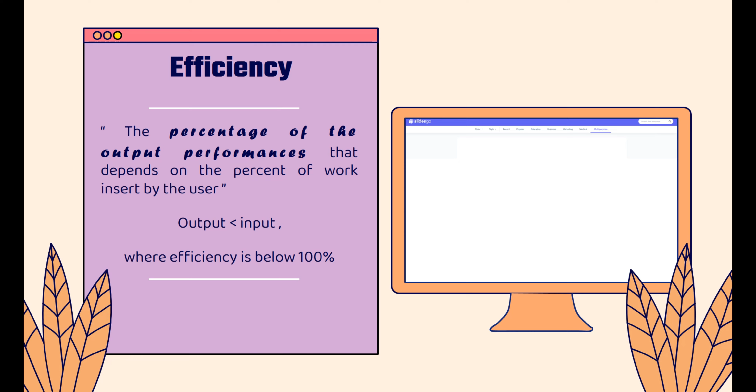Nur Shahada, and I will explain briefly about efficiency and its general expression. So, efficiency is the percentage of the output performance that depends on the percent of the work that is put in by the input or a user, plus the output work always needs to be less than the input work. Therefore, the percentage of efficiency is always less than 100%. And that is why efficiency can be expressed in percentage as output power divided by the input power.

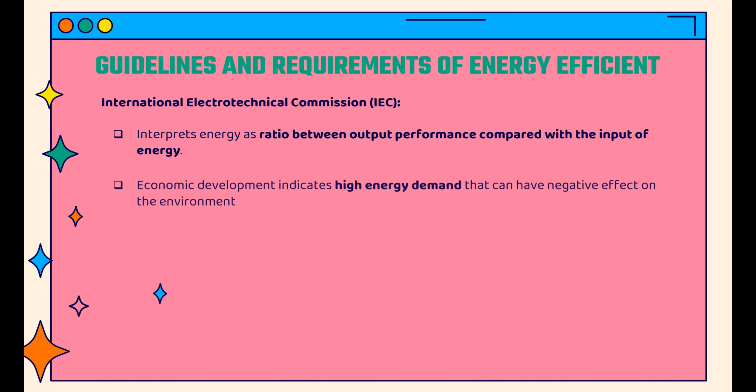Guidelines and requirements of energy efficient motor. The International Electrotechnical Commission interprets energy efficiency as the ratio between output performance compared with the input of energy. Economic growth indicates high energy demand. However, this energy demand can have negative effect on the environment. Thereby, energy efficiency is a cost-effective means for supporting the growing energy demand.

As we know, energy efficient technologies are already available, yet some obstacles hinder the implementation of energy efficiency solutions. For example, one of the obstacles is that they focus on the performance of the device rather than the system. However, standardization can offer solutions to help defeat these obstacles. So, the Advisory Committee on Energy Efficiency has developed Guide 118 and Guide 119.

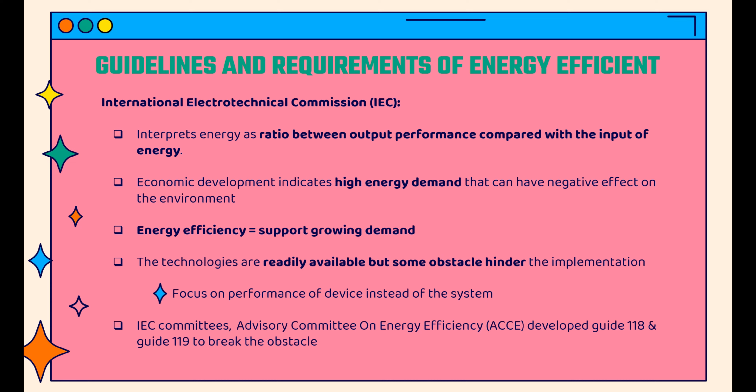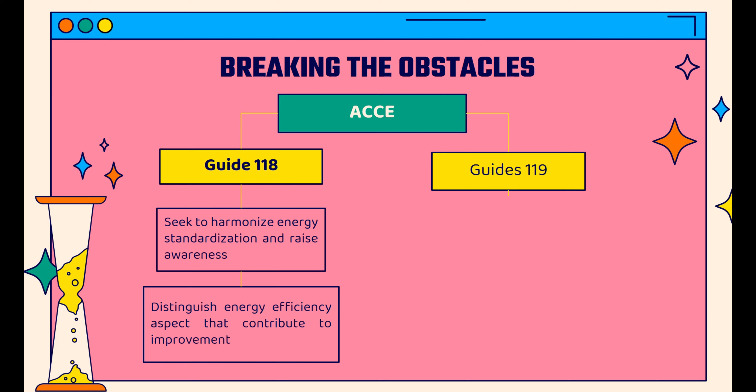Guide 118 seeks to harmonize the energy standardization and raise awareness that IEC publications can affect energy performance in both positive and negative ways. It also assists the committees to distinguish energy efficiency aspects that contribute to the energy efficiency improvement of the product when developing standards.

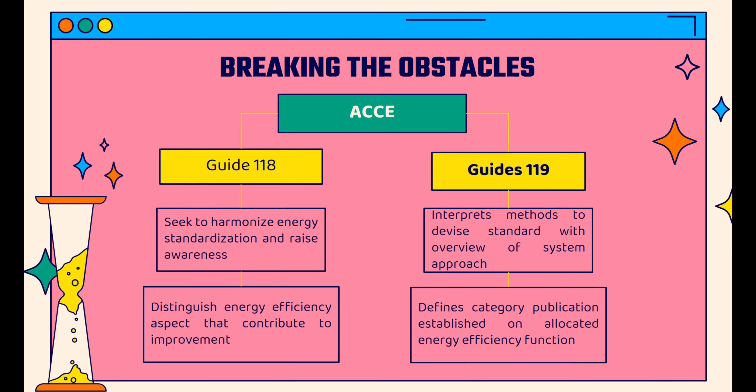Meanwhile, Guide 119 defines the technical and organizational methods to follow for the preparation of these standards. It provides an overview of how a systematic approach can be adopted and defines the type of publication based on the assigned energy efficiency function. IEC also developed an international efficiency classification.

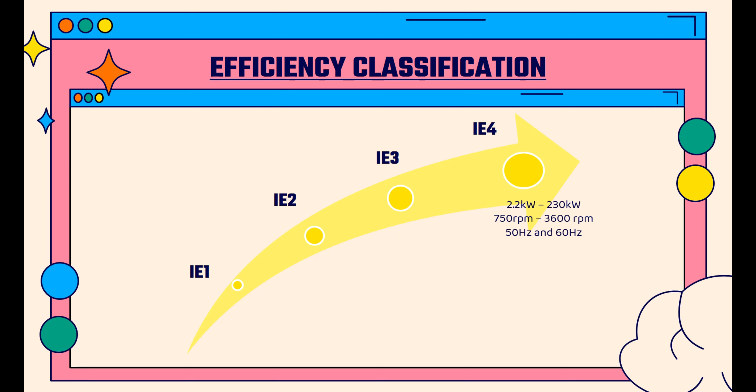The classification distinguishes between 4 efficiency levels, with IE4 for the most efficient motors and IE1 for the least efficient motors. The IE4 motors lie in the super premium efficiency range, with an output power from 2.2 kW to 230 kW, and speed range between 750 rpm to 3600 rpm. Next, the IE3 motors lie in the premium efficiency range, with a speed range between 750 rpm to 3600 rpm.

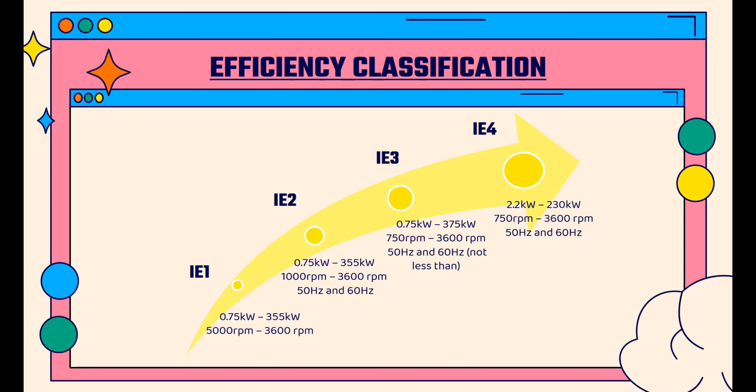The IE2 motors lie in the high efficiency range with a speed range from 1000 rpm to 3600 rpm. Lastly, the IE1 motors lie in the standard efficiency range with a speed range of 500 rpm to 3600 rpm. For IE3, IE2 and IE1, these three have a rated output power of 0.75 kW to 375 kW. Plus, for all of the efficiency levels, the frequency must be 50 Hz and 60 Hz only.

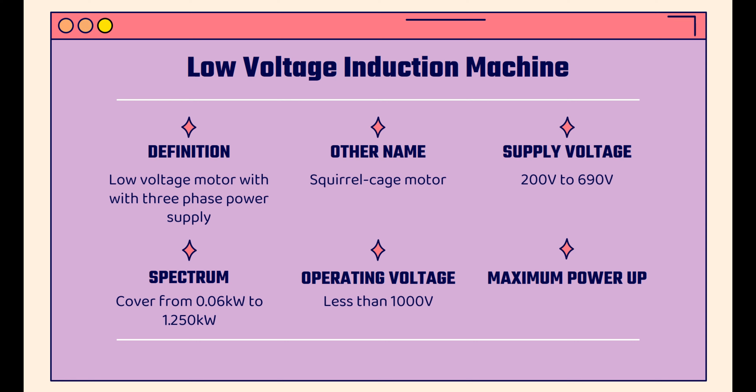Next, we will continue on the method of how to measure efficiency on low voltage induction machines. First of all, a low voltage induction machine can be defined as a squirrel cage motor with 3-phase power supply with a range of 200 volt to 690 volt, covering a spectrum from 0.06 kilowatt to 1250 kilowatts. To conclude, it is actually a low voltage motor with 3-phase power that operates at an operating voltage less than 1000 and produces maximum power up to 1250 kilowatt.

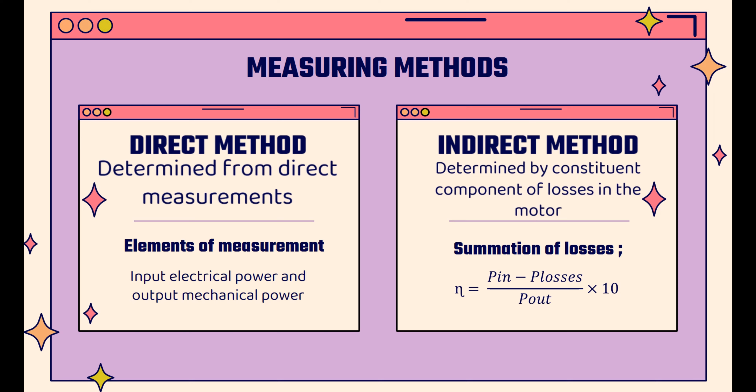According to the standards, there are 2 major ways to determine efficiency of a low voltage induction machine, which are the direct method and indirect method. For the direct method, the efficiency can be determined from the direct measurement of the input electric power and its output mechanical power. Meanwhile, efficiency from the indirect method can be determined by the input and output power measured, used to determine the constituent component losses in the motor. This process is known as the summation of the losses. So, those are the 2 ways to calculate the efficiency for the low voltage induction machine.

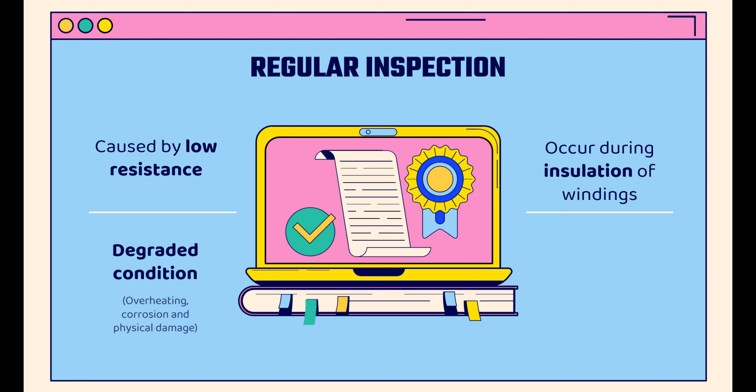Hi, my name is Amir Iskandar bin Muhammad Khalil and I will talk about methods to improve the efficiency of electrical motors. First is regular inspections. The most common cause of motor failure is low resistance. This occurs when the insulation of the windings is degraded by adverse conditions such as overheating, corrosion or physical damage, leading to insufficient isolation between windings, leakage, short circuits and eventually motor failure.

The second one is protect against electrical overload. Electrical overload or overcurrent occurs when the current that the motor is designed to carry efficiently and safely is exceeded. The most common cause of this is a low voltage supply, which causes the motor to draw in extra current in an attempt to maintain torque. However, it can also be caused by short circuit conductors or an excessive voltage supply. The installation of effective overcurrent protection can detect overcurrent before it becomes a problem.

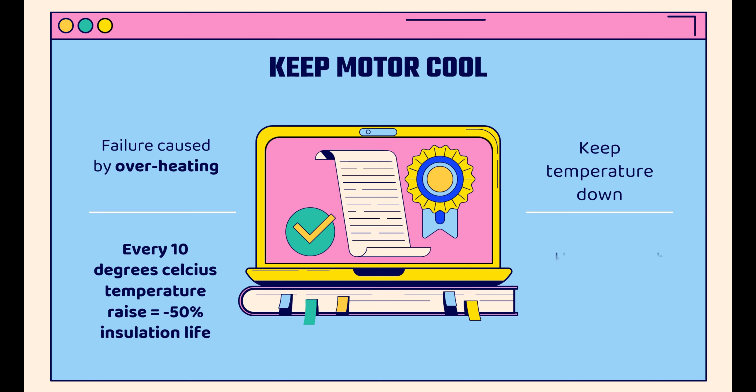Interrupting supply and protecting against overload, this will enable the motor to operate at maximum efficiency whilst reducing the chance of breakdown. The third is keep cool. With around 55% of insulation motor failures caused by overheating, the benefits of keeping your motor cool are clear to see. For every 10 degrees Celsius that the temperature of a motor rises, the insulation life is reduced by 50%.

The fourth is monitor vibration. Vibration in an electric motor is commonly caused by an uneven or unstable surface. However, it can also be a result of an underlying problem such as loose bearings, corrosion, or misalignment. It's important to monitor vibration levels as excess vibration can cause the motor to fail prematurely.

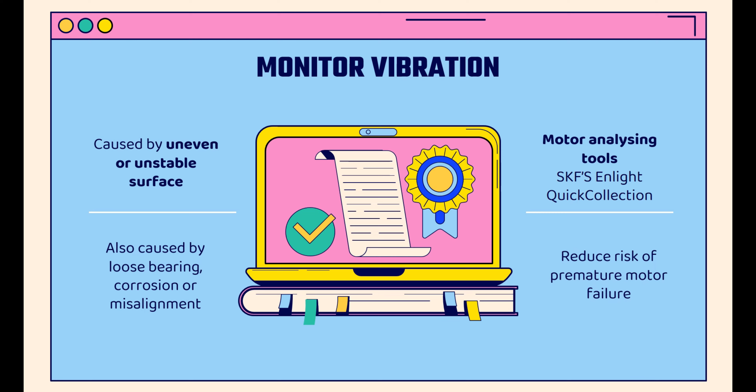And the last one is protect against contamination. Electric motors often operate in environments which are contaminated by dust, dirt, or chemicals. However, with contamination being one of the leading causes of motor failure, it is critical to ensure that electric motors are well protected against contamination.

Hello, my name is Atika and I'm going to continue the presentation with a little explanation on cost saving and payback periods of an energy efficiency motor. We know that an energy efficiency motor is basically an improved version of electrical motor which has better working performance. This factor contributes to cost saving as usage of an energy efficiency motor can actually cost less than usage of a standard motor. An energy efficiency motor has higher service factor, longer insulation and bearing lives, lower losses, less vibration which increase

the motor reliability. We have to know that the amount of money that can be saved by using an energy efficiency motor instead of a standard motor depends on a few elements like motor size, annual hours of usage, load factor, efficiency improvement, and utility charges for electrical demand and energy consumed.

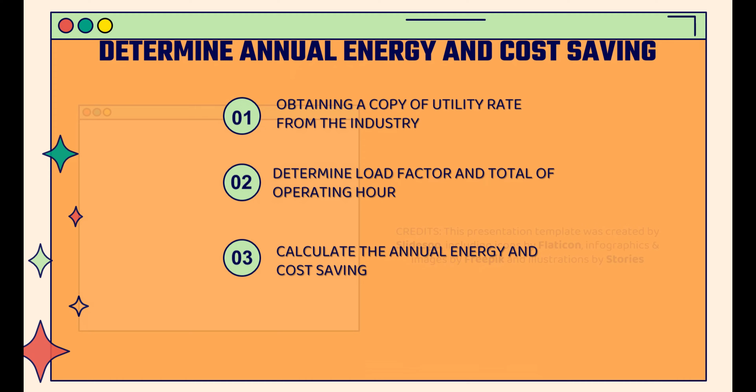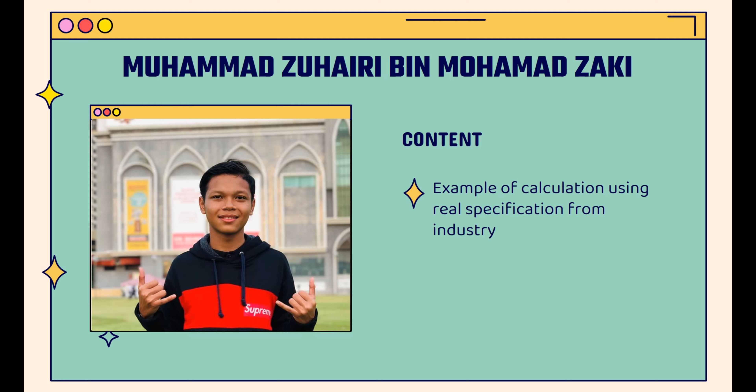Hello, my name is Muhammad Zuhairi bin Mohamad Zaki and I will continue with calculating the cost saving and payback periods by using an energy efficient motor. Now let's read the example above. The following analysis for a 100 HP TEFC motor operating at 80% of full rated load illustrates how to determine the cost effectiveness of obtaining an energy efficient versus a standard efficiency motor for the initial purchase case.

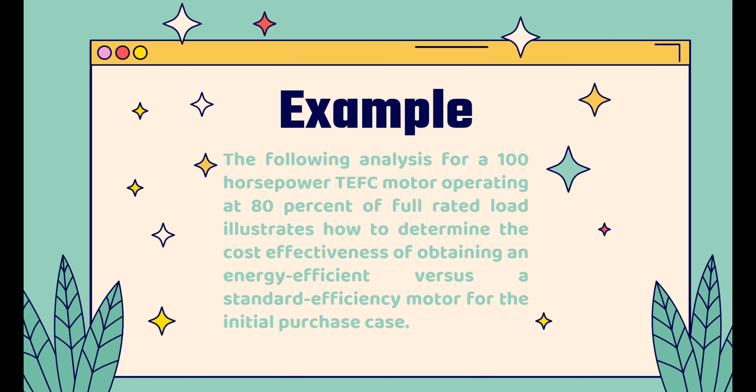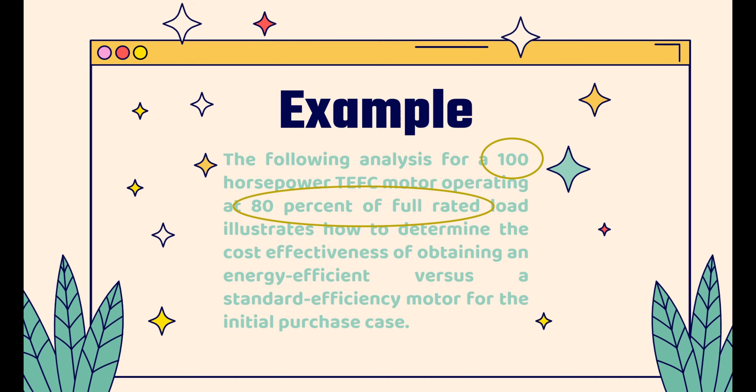Okay, so the main point we get is 100 HP TEFC, a totally enclosed fan cooled motor, and 80% of full rated load. To get the kilowatt saved, use the formula kW saved = HP × load × 0.746 × (100/E_STD − 100/E_HE). Okay, so HP is 100, load is 0.8.

E_STD is the standard efficiency motor efficiency, while E_HE is the energy efficient motor efficiency, which can be obtained from the table above: average efficiency and typical list price for standard and energy efficiency motors. When we substitute the value of each parameter, the final value of kilowatt saved obtained is 1.78.

Next is energy saved. We use the formula kWh saving = hours of operation × kW saved. Hours of operation, basically we use 5110 hours in a year, and kilowatt saved is 1.78. Again, when we substitute the value into the formula, we get 9095.8 kilowatt hours per year.

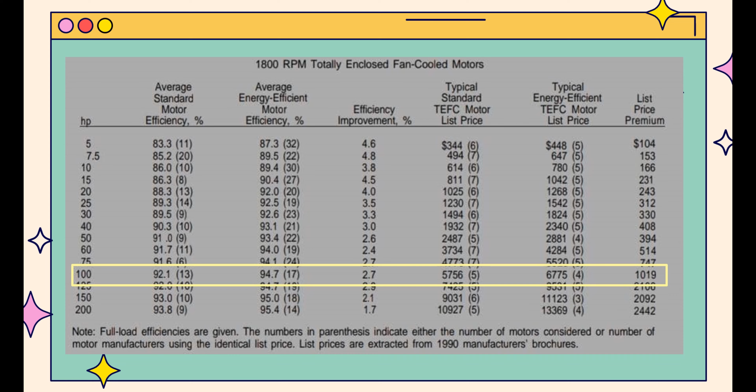$1019 converted to RM, we get RM4126.95. Lastly, enter all the obtained values into the formula, and we know the payback period is equal to 1.02 years. Thank you.